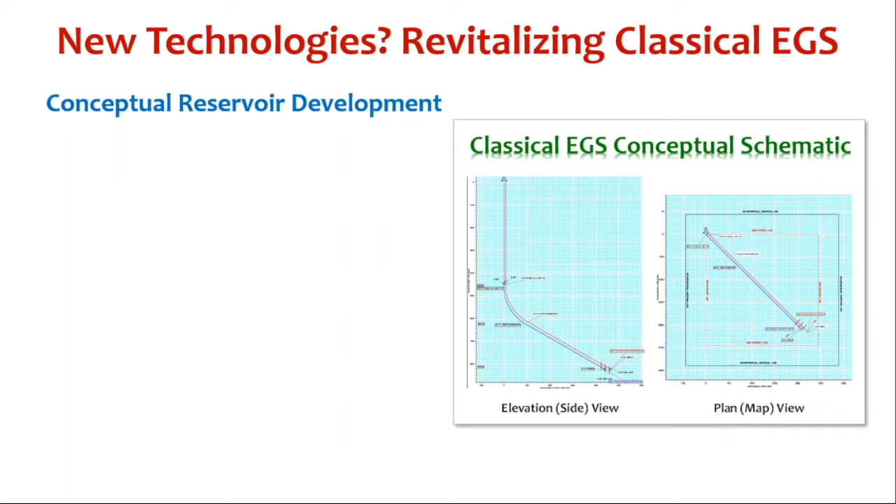The EGS pilot at the Forge site in central Utah entails the schematic that I'll show here. The first thing involved in producing one of these sites is to have some sort of injection well, and at Forge we have indeed drilled this injection well. After the injection well is drilled, a set of hydraulic fractures are created that will ultimately join with a production well. We are at the point now at the Forge site where we've drilled the injection well.

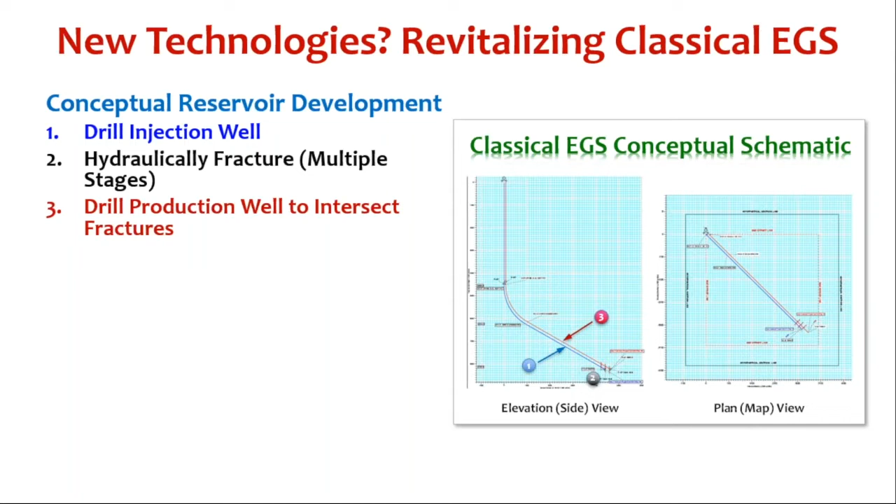We've done a small set of hydraulic fractures at the toe of this injection well, and subsequently this fall or early next winter, early next year, we will drill the production well to establish the basics of a heat exchange system.

In a commercial setting, there would be fractures all along the length of the two well bores to provide large surface area for heat exchange to occur as fluid moves from one well to another through the fracture system. So conceptually, in a commercial setting, injected cold water would circulate through the fractures that are created.

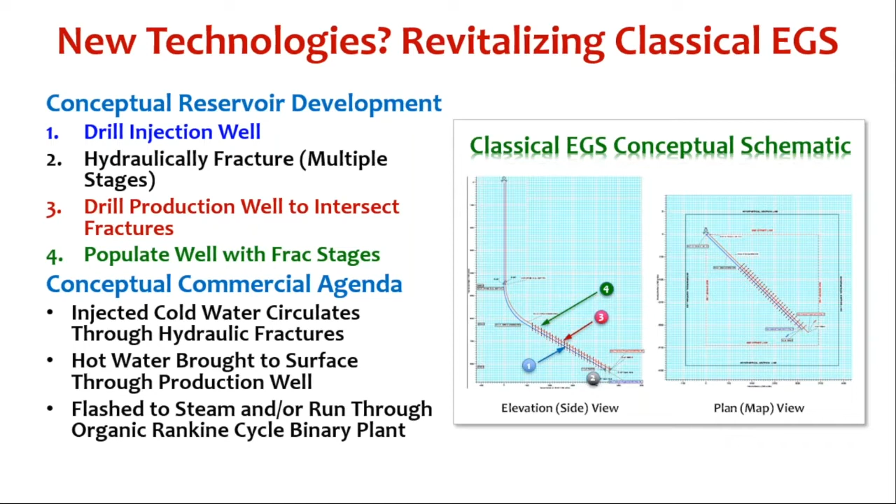I'm using hydraulic fracturing - there's possibilities of thermal fracturing or acid fracturing in certain settings. Once that hot fluid gets to the surface, it's conventional conversion to power in a geothermal setting.

So at the Utah Forge site, we've currently drilled 6 wells. Now, most of those wells are monitoring wells, and you can imagine monitoring wells are required because this is a pilot - a scientific pilot that is designed to test out and extend these technologies.

In addition to these monitoring wells, one injection well drilled at a 65-degree angle to the vertical has been completed - we're going to call that well 16A. On the aerial view to the left, you can see the vertical projection of that well, and you can see surrounding wells where geophones are in place and other monitoring operations will be ongoing.

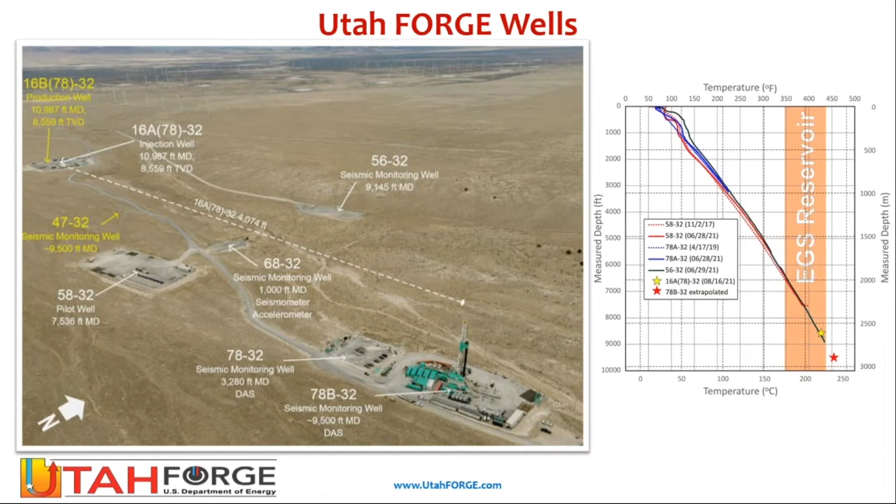Now, to give you a perspective of the temperature, it's high enthalpy, but not extraordinarily high. The bottom hole temperature at the toe of this well is about 230 degrees C. But regardless, as we know within the geothermal community, temperatures of that magnitude are the blessing and the challenge of the geothermal system.

And there's the challenge because they preclude the use of many conventional monitoring and stimulation technologies, isolation devices, packers, and things like this because of temperature limitations.

Indeed, if you look at availability of equipment - apologies for the temperatures in Fahrenheit - there is some logging equipment, maybe some density logs and some multi-finger calipers and other devices that go to 500 Fahrenheit. But in most cases, there's a restriction on logging tools at 300 to 350 degrees Fahrenheit, and obviously, as we all know, that has consequences in terms of reservoir characterization.

Similarly, in terms of drilling and steering, MWD tools commonly have even a 275 degree Fahrenheit limitation. So temperature is the first issue that we all have to deal with in the geothermal community.

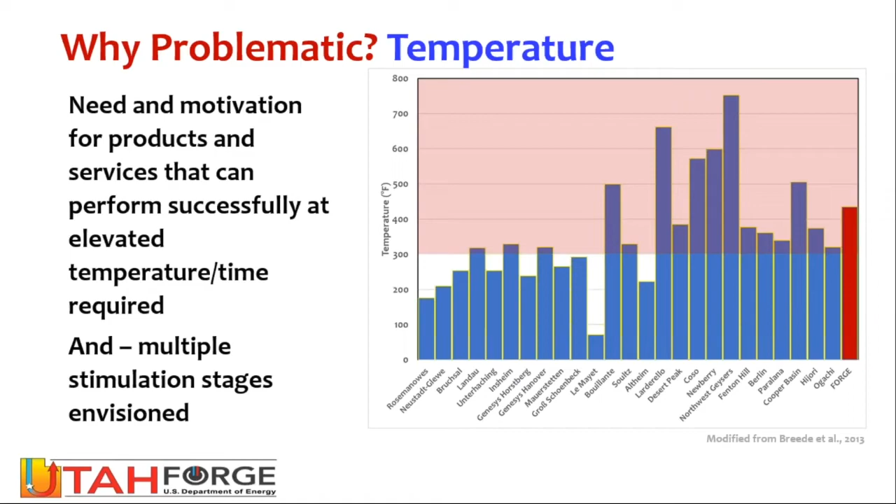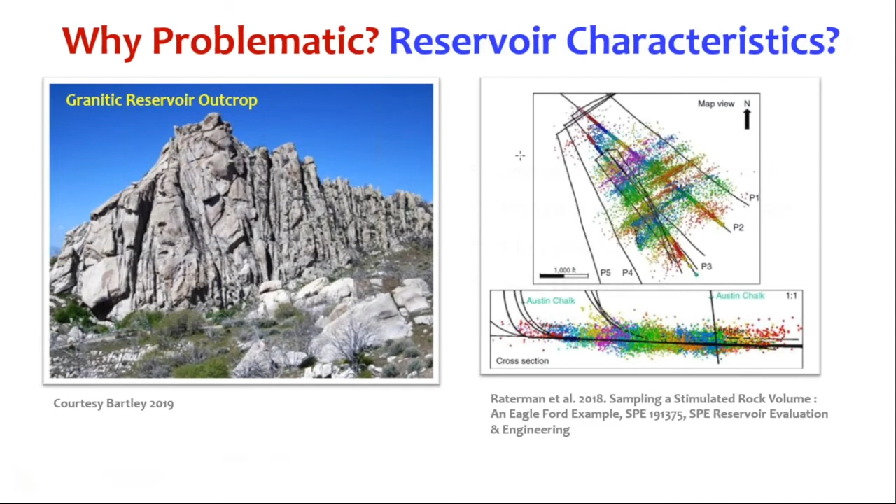Now, one asks, in this geothermal setting at Forge, if we move to the photograph at the left, which is actually the Forge reservoir, what are the implications of these natural fractures? Certainly these fractures are exaggerated in this outcrop because of erosion and de-stressing, but there are many, many fractures mapped in situ, and one of the challenges is understanding the role of those fractures.

A second role of this program at Forge, beyond understanding the role of fractures and overcoming some of the temperature limitations, is dealing with some of the geomechanical quandaries we often face in terms of the ability to have these hydraulic fractures intersect two wells. And this is not a new concept.

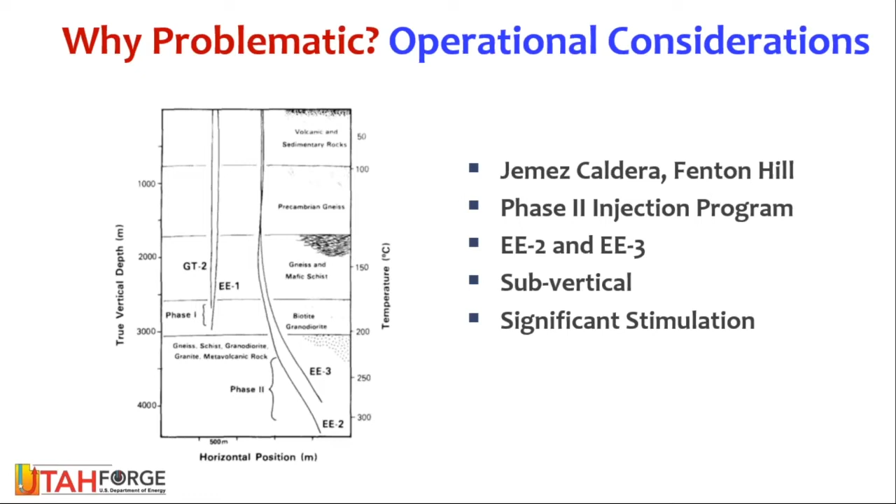This was pioneered at the Fenton Hill project in Jemez Caldera, New Mexico, in the late 70s and early 1980s. Here is an example where a large hydraulic fracture was pumped in well EE2, attempting to intersect well EE3. These wells, as you can see, are subvertical.

But unfortunately, if we look at the microseismic signatures, and this is one of the earliest applications of microseismicity as a monitoring tool, we can see the production well EE3, the injection well EE2, and most of the seismic activity forecasts fracture growth that did not lead to an intersection. In fact, that was a complication at this site, that the intersection was weak.

So nevertheless, we have updated drilling technology that allows us to steer these wells. And this is the reason why, in the earlier diagram, we're drilling one well first, fracturing at the toe of that well, monitoring microseismicity, and then drilling the second well into the microseismic cloud with the anticipation that we will be able to establish some sort of connection.

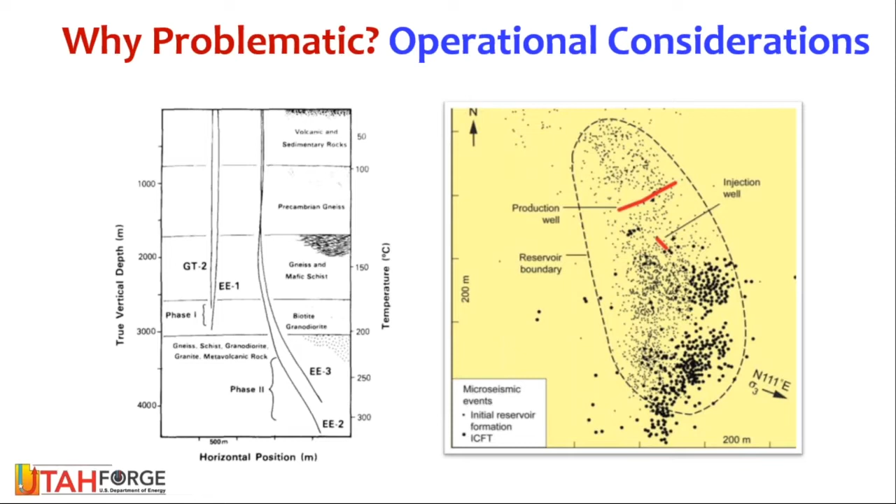So operationally, we're looking at directionally drilling these wells in an appropriate direction. We're also looking at developing packers that will allow isolation along the length of this injection well so that we can create multiple fractures. One of the things encountered here has been the difficulties in having packers function successfully, and that remains a challenge.

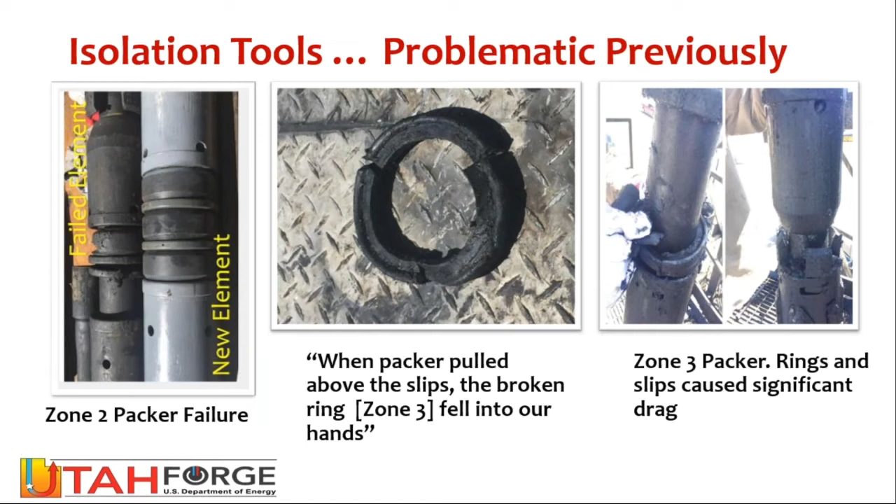Actually, this Forge program is sponsoring research through the Department of Energy to try and address some of those issues. Other problems we are trying to address at this particular site relate to drilling, including aspects of drilling with the application of PDC bits that has dramatically changed the rate of penetration and the time on bottom in these wells.

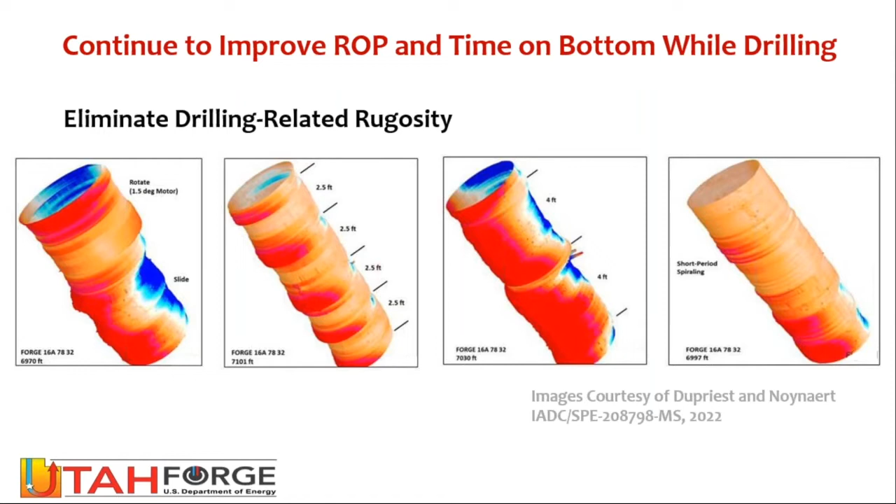Okay, so that's a very quick background. We have a situation where we've drilled the first sub-horizontal well, and we have just finished creating some hydraulic fractures at the toe of that well, and we're trying to comprehend the issues of temperature, the issues of natural fractures, and some of the operational considerations.

And those all come into play in terms of the hydraulic fracturing stimulation that was just carried out in April of this year. To be honest, that stimulation is not substantially different than the large stimulation I described at Fenton Hill, done in late 1983. That stimulation used slick water, which is strictly water with friction reducer added.

As you can imagine, you're pumping at a high injection rate in this particular situation, at 50 barrels per minute, and about just under 6 million gallons of fluid. So a lot of fluid, a high injection rate, and a little bit of solid particulate matter added for diversion.

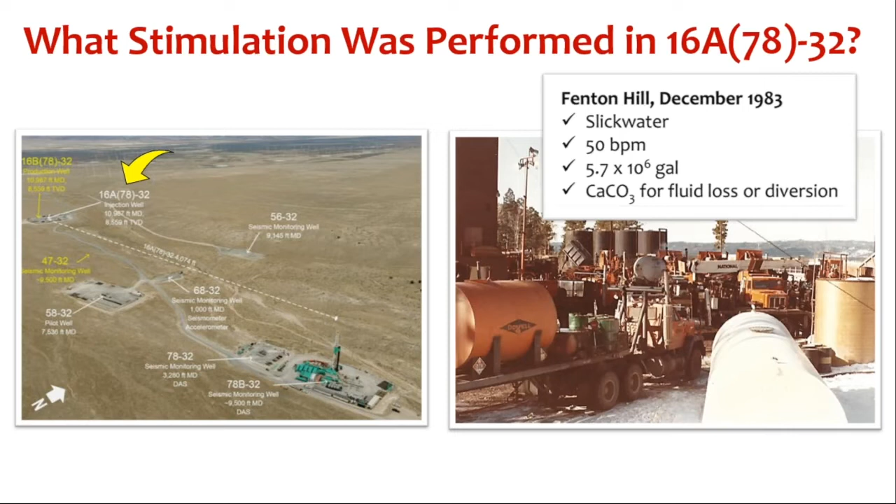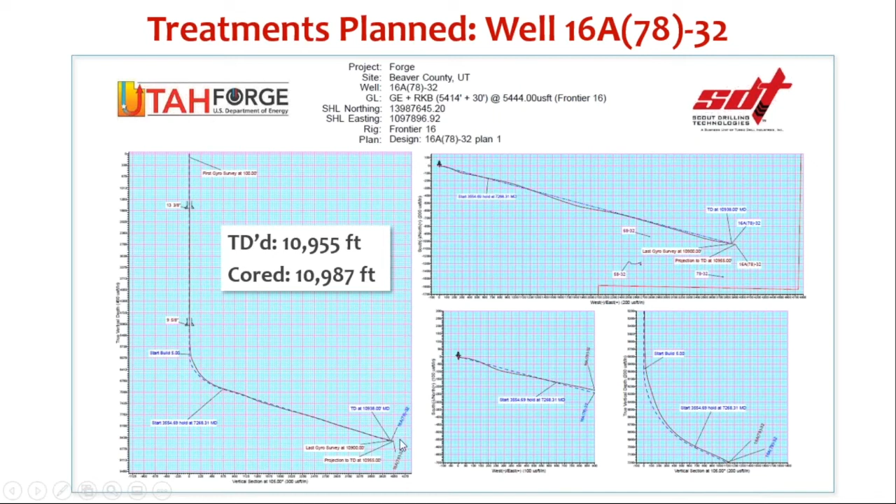Candidly, the stimulation treatments we adopted at Forge were not significantly different. They were done in this particular well, and you can see the cross section here. Those treatments were done right at the very toe of the well. The first treatment was done in a 200-foot open hole section, below a measured depth of just under 11,000 feet. Like the Fenton Hill treatment, this was done with slick water at up to 50 barrels per minute, with an organic tracer added to this particular stage.

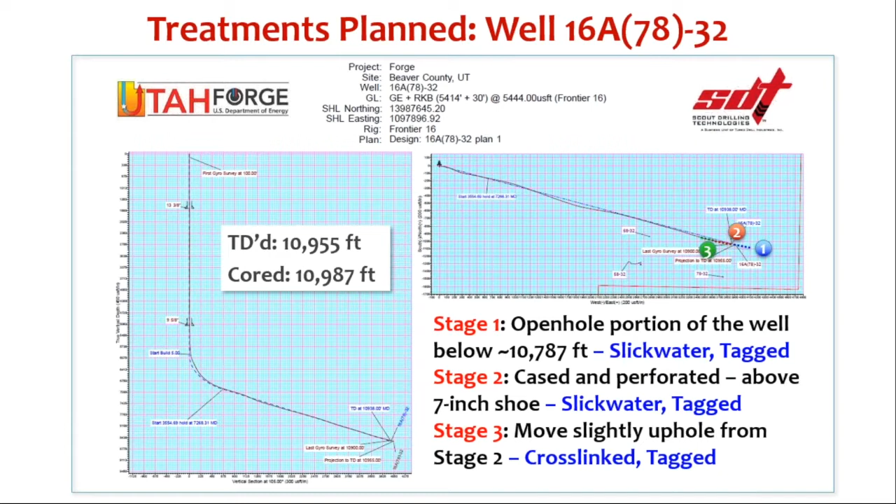Subsequently, for the second stage, we flowed back the first stage and moved up the hole into a cased section. We isolated this cased section with bridge plugs, which I'll show you in a minute. The bridge plugs overcame some of the temperature limitations. Once again, we pumped a slick water treatment with an organic tracer. After flowing that back, we moved up the hole, isolated and perforated again, and pumped a cross-linked fluid, a cross-linked CMHPG fluid with an organic tracer.

In particular, trying to overcome the temperature limitations I talked about earlier, we searched around and found a company able to provide devices qualified at the required temperatures and pressures. This turned out to be Interwell, a company out of Norway with US operations, and their bridge plugs worked extremely well. The only drawback was that the setting tool for these bridge plugs couldn't tolerate the temperatures if wireline set, so we had to have a rig and run them on pipe. Nevertheless, for this experiment, this was an adequate solution, and they worked extremely well.

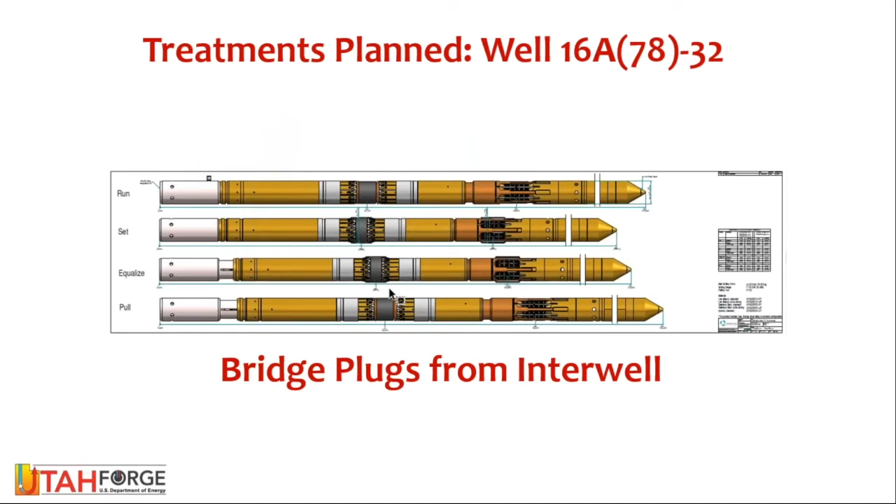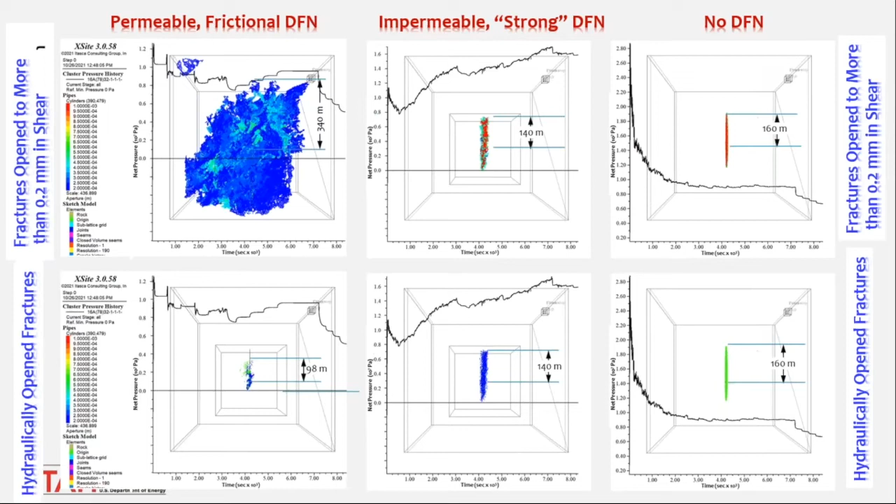Whether you have a permeable, frictional DFN network with very diffuse propagation of fluid through a broad area, or whether the DFNs are less permeable, have some strength, and lead to a fracture morphology like this, or in the extreme case, as we might imagine from the example in Texas, basically ignoring the DFNs. We were able to, and are still working to, back-analyze our microseismicity to understand this.

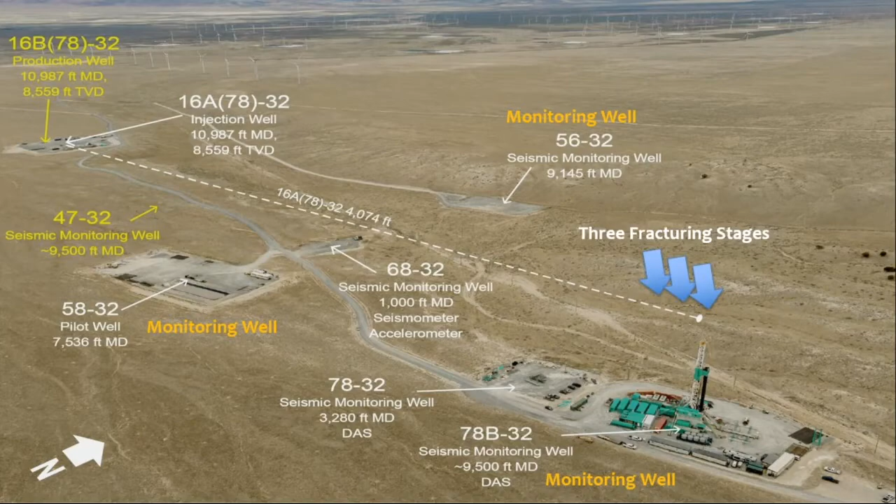So the stimulation was carried out in April of this year, with 3 fracturing stages at the toe of this well, at a 60-degree angle to the vertical. Those 3 stages I described had monitoring wells with geophones to depth, and relatively shallow DAS cables in this well and in this particular well, 78-32 and 78B-32.

Prior to the first stage, we also pumped a low rate injection test, trying to assess if shear stimulation had any impact. We had already tried something like this immediately after we drilled the well. This would be in the open hole section, pumping at a very low rate, 0.36 barrels a minute, less than 0.06 cubes a minute, and not a large treatment.

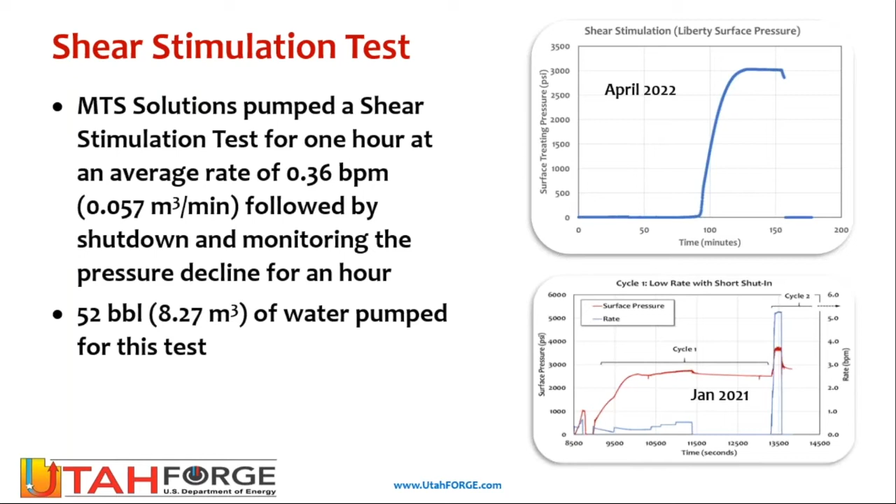What we tended to see is that this fracture just opened up, just like a door, and there was little microseismic activity, as I understand it. So there wasn't a significant amount of evidence suggesting that shear stimulation was going to be effective.

We followed this immediately with a higher rate injection, in the open hole section of the well, at about just under 8 cubic meters per minute of slick water, with just under 700 cubic meters pumped. As you can see, the pressure record is in red, the rate record is in green, up to 50 barrels per minute. We didn't quite know what was happening, so we walked up the rate gradually, kept it at 50 barrels per minute, and then did a step down afterwards.

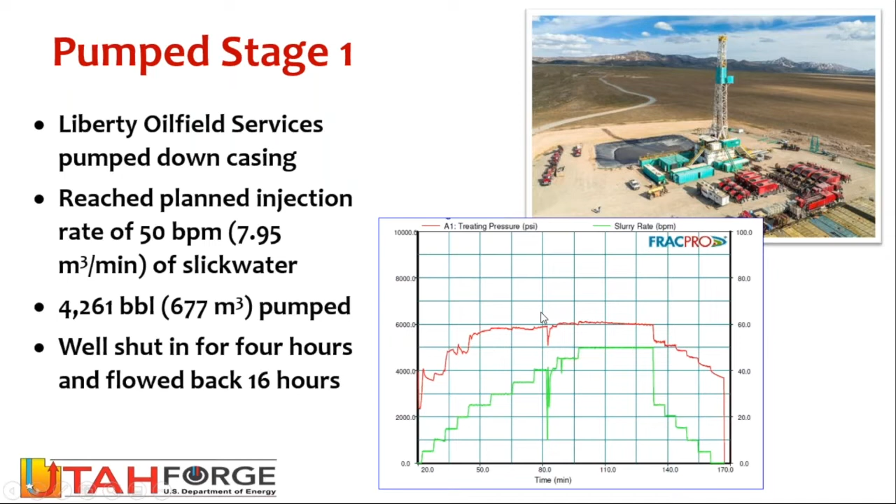It was a successful treatment. The interesting thing about the pressure here, in this 200-foot open hole section, is that it's very different than the pressure profile in a cased and perforated section of this well, which we'll see shortly.

So we completed that first section, and we flowed the well back. We flowed back because we were uncertain of whether there were going to be any poroelastic effects, poroelasticity in a fractured medium, mind you.

We flowed back, and then we ran into the hole with the bridge plug. You can see the elastomeric seal of this bridge plug in the center photograph running into the hole. The bridge plug was successfully set and tested to 7,000 PSI, then we ran in the hole with a perforating gun. A 20-foot gun, 6 shots per foot, 21-gram charges, as I recall.

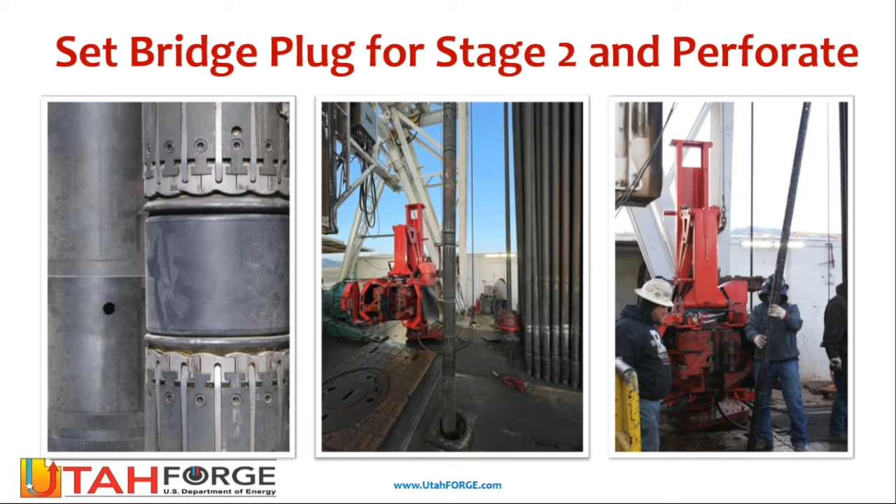The reason we ran such a long gun is that we wanted to ensure we would encounter some sort of natural weakness along the way that would help with the initiation or initial propagation of the hydraulic fracture. So we've carried out the first stage, set a bridge plug to isolate it, and perforated above that bridge plug to provide access to the formation again.

Then Liberty Oilfield Services pumped the second stage. Once again, a slick water system, water with friction reducer, about 440 cubic meters of fluid pumped at 5.5 cubic meters per minute, a lower rate because there will be perforation friction here.

There were 2 intentional shutdowns partway through this treatment to monitor for any change in seismicity and to look at water hammer effects. You can see a very different morphology of the pressure. We have not had time to do the modeling to fit this, but this is a classical pseudo-radial pressure phenomenon for a single fracture, and indications are that we have a relatively simple fracture system.

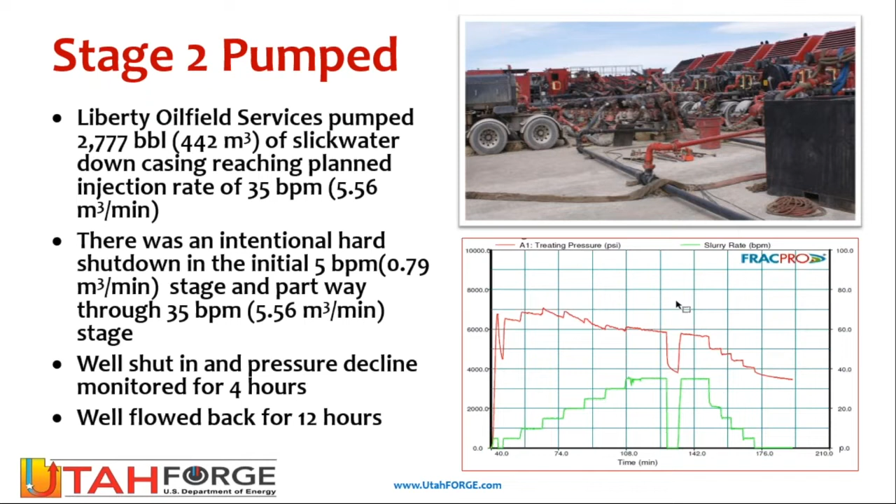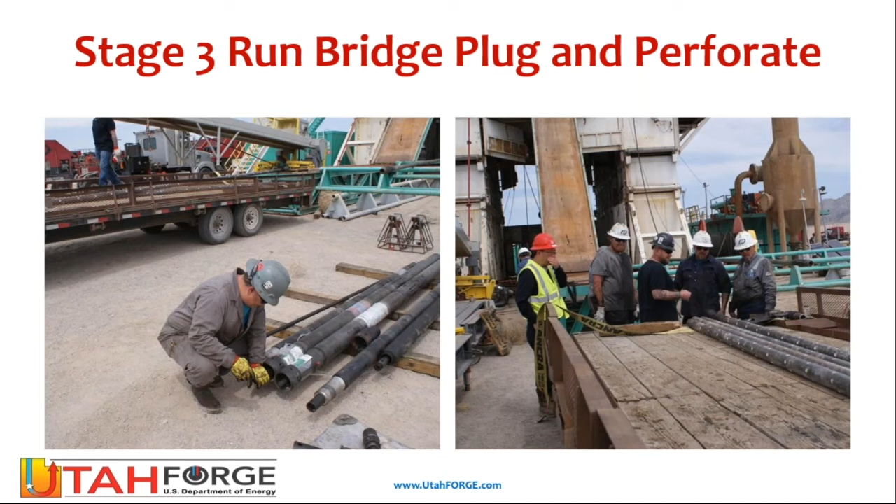We flowed the well back after shutting in this particular well. We went back in the hole and set a bridge plug above those perforations, perforated above the bridge plug, and went in with the third fracturing stage.

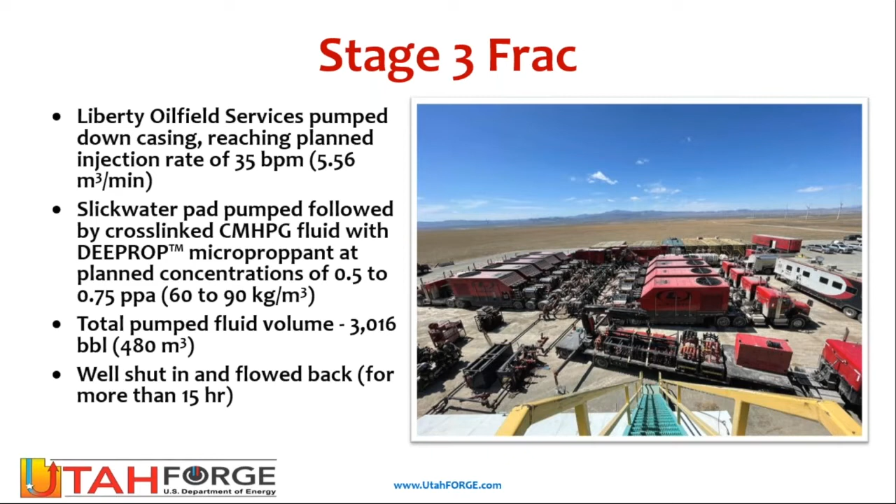The third fracturing stage was a cross-linked fluid pumped at up to 35 barrels per minute. Once again, you can see characteristic radial fracture behavior, and preliminary microseismic events suggest a feature that is relatively radial in characteristics and relatively constrained laterally along the length of the well.

Much more analysis is to be carried out, and I need to really acknowledge the strong work and great interaction that we had with Geo-Energie Suisse on this particular project.

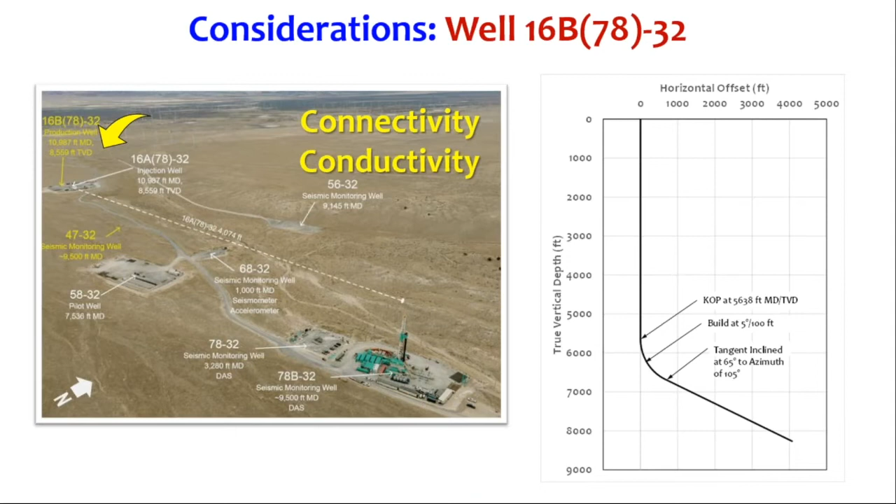So we've done this frac. The next stage will be to drill a well to intersect that fracture, and once we intersect, we're going to evaluate four things. We're going to evaluate and, if necessary, mitigate the degree of connectivity. We'll ultimately have additional experiments where we assess the role and how to change the conductivity of the fractures, proppant, for example. We will evaluate conformance, which is going to be a particularly important issue, conformance being equality of flow within each one of the fracture systems. And then ultimately, we will look at thermal depletion and how much electricity could theoretically be generated from this site.

So that's a very brief overview. I'd like to thank the Department of Energy, and I'd like to thank all of our partners on this frac job. There are just too many to mention, but it was, I think, an outstanding success. All this information will be public, and we hope it will be useful and fodder for a lot of analysis and insights.

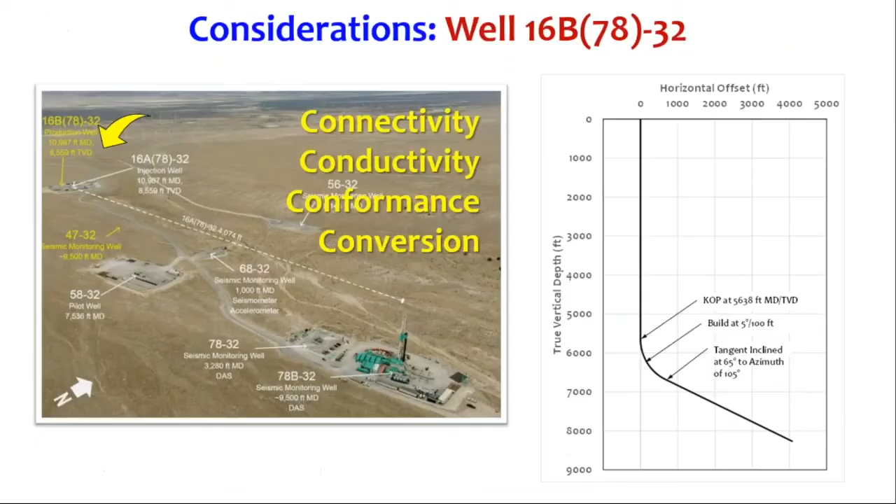Okay, so next question, the estimate of the frac half-length that was achieved. We haven't done the history matching for the models, but I suppose if one goes back and looks at this, I would guess the frac length - it's a pseudo-radial fracture, maybe 150 meters in dimension, maybe slightly higher in the vertical direction, almost like an inverted pear, relatively planar. But in terms of height growth, which we're most interested in, it looks like it's very favorable for intersection by the second well.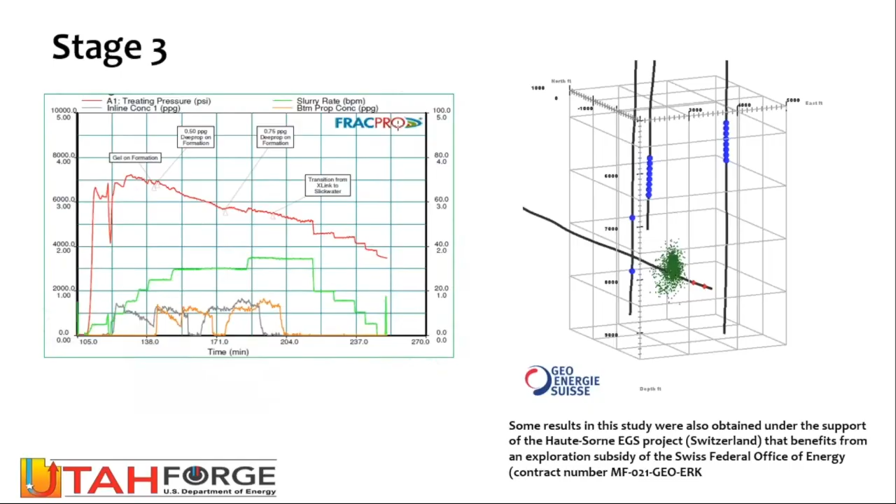Okay, here's the next one. How much pore space have you created in between wells based on the tracer tests? Could you repeat the question? I'm not sure that I completely understand. How much pore space have you created in between wells based on the tracer test?

Well, all we've done with the tracers at the present time is we've injected the tracers in each stage, and we flowed back and monitored the tracers. So I think we have really no quantifiable interpretation from the tracer at the present time. We'll be able to do more interpretation of the tracer once we drill through the tracers with the second well, and possibly bullhead the tracers a little farther through. So I don't think we know the answer to that question yet.

Okay, then the next question is, have you considered using CO2 as the fluid to extract heat in the future? Yes, there remains a lot of interest in terms of using CO2 and in terms of Brayton cycle technology, for example, at the surface.

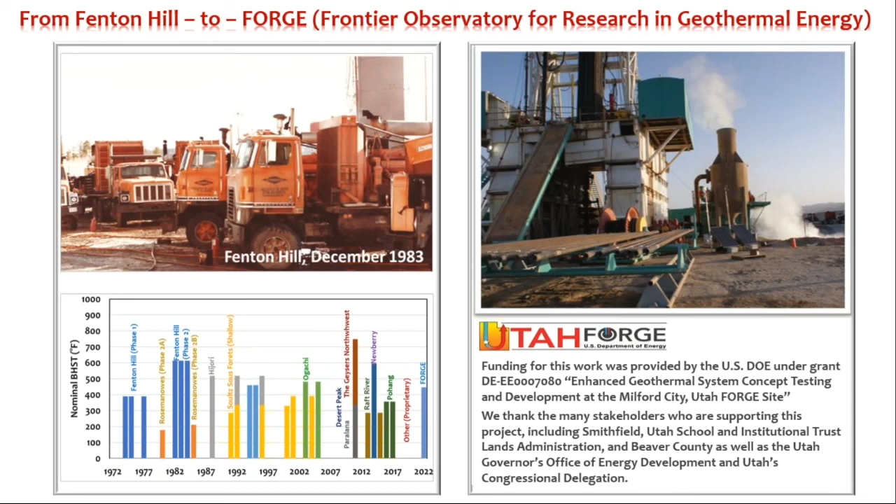These were preserved, so I think, as the questioner pointed out, the key to solving this is when you initially drill the hole, not when you try to remediate it.